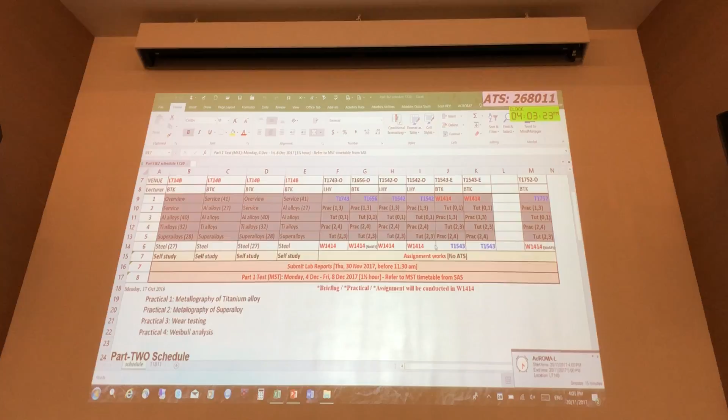Only the MST, right? Okay. So by this week, we will finish the last topic that will be tested for the MST part 1 test.

So this will be the last topic for the part 1 test. Okay, are we all ready? So altogether there will be 5 topics for the part 1 test. It's held during the MST. So for convention, I just use the word MST. It is not the MST paper, it's part 1.

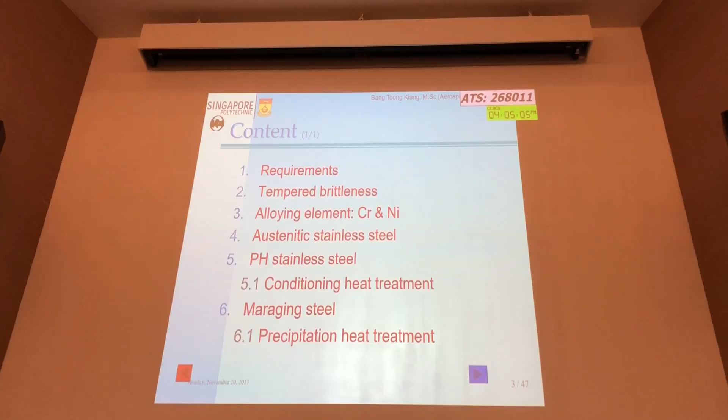It's 30%, right? So the part 1 test will only cover the topic we have learned so far until special steel. So this is the last metal. Next, part 2 will consist of non-metal. This metal, we have gone through aluminium metal, titanium, superalloy, and now we want to finish up with special steel.

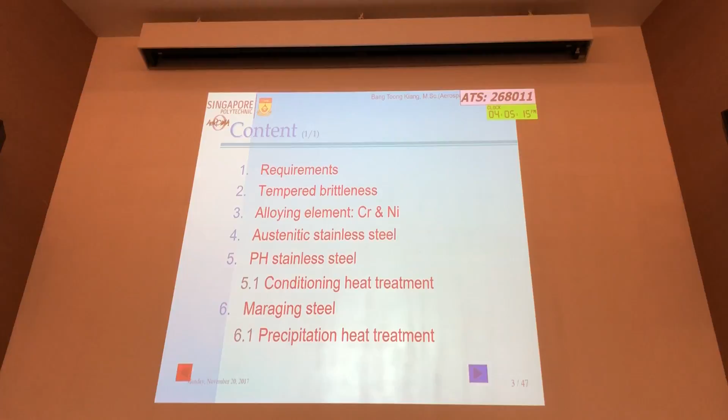From year 1, year 2 and onward, until today, you can see that you have been exposed to steel. Steel is the very first engineering metal. So it has been with us for many years. As I said, very difficult for me to compete with 120 of you.

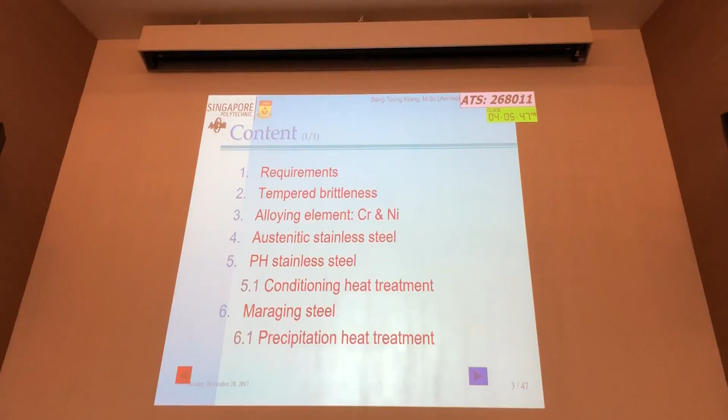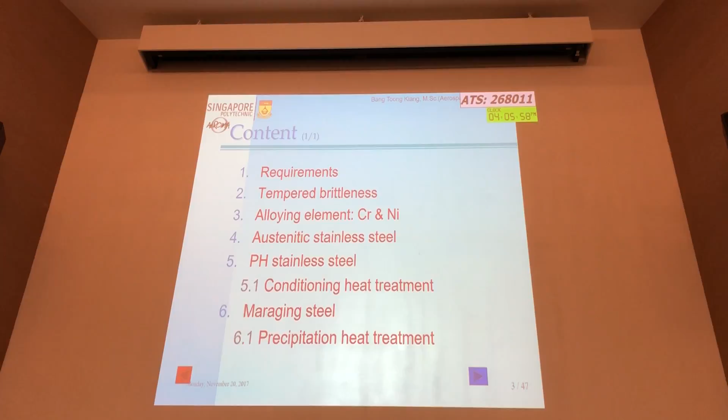Now, so is it still relevant? It's a very old metal. People think that is depending on how you look at it. Obviously, in order to make it relevant, we need to do something. We need to upgrade, right? Including myself, everybody needs to upgrade as we move along.

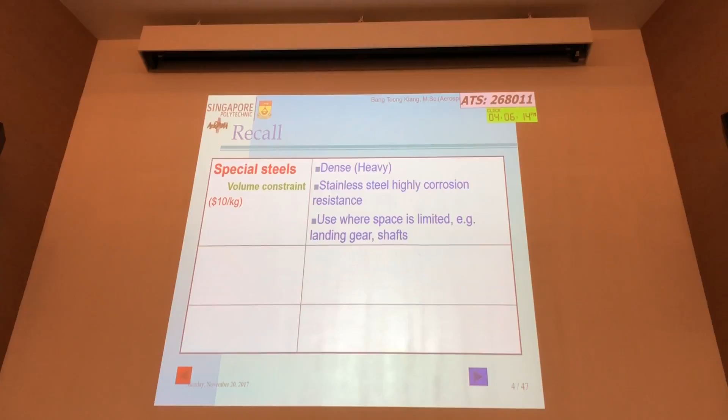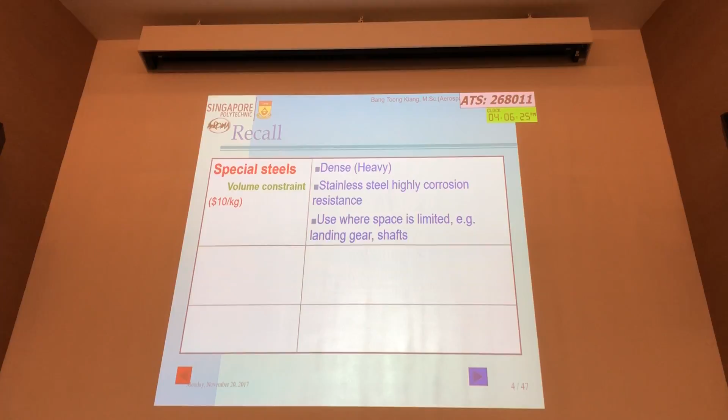We know that steel, as I said, you have already gone through in your year 1, in the very first, second topic of year 1, plain carbon steel, right? So until today, it's still relevant. Obviously, when we move along, we need to do something about it. Why is it that it's still relevant? It is relatively cheap.

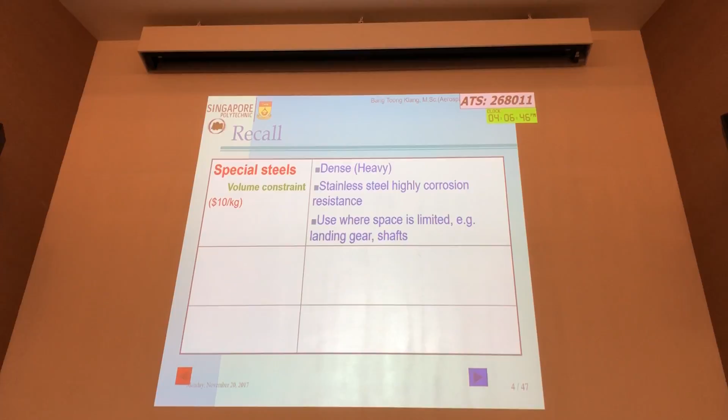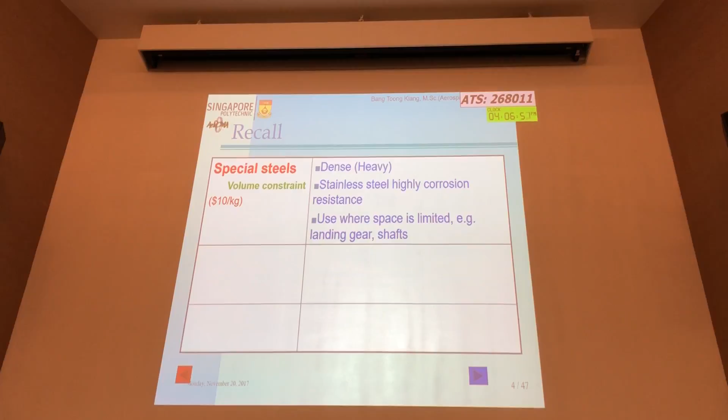We can make special steel, alloy steel we call it, so that it's stainless. So steel itself, initially very cheap, very limited property, but we do some adjustment in the chemistry, right? We're able to use it in a variety of applications. So now in aircraft, we still use it, of course, where space is limited. Landing gears, right? Shaft and so on. No point using titanium, too expensive.

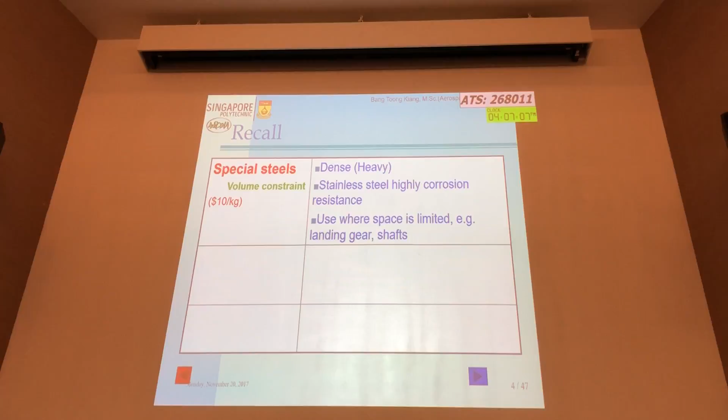And when you talk about the absolute strength, steel is even better, very high strength. You can see that there are applications that is not aerospace that actually make use of special steel. It's developed by Carpenter Technology, which is involved in a lot of aerospace material, aerospace metal.

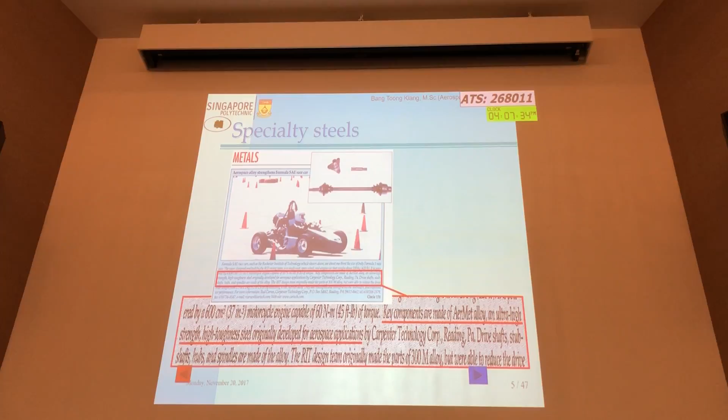Okay, so the key thing is that it's maybe solid. Solid means good in a certain sense. So good that we call it, quite a number of years ago, the advertisement about the army, they call it the steel within. They don't call it titanium. In the army, talking about titanium.

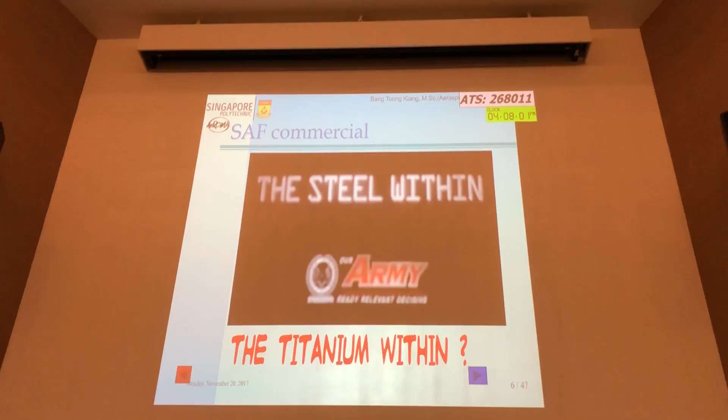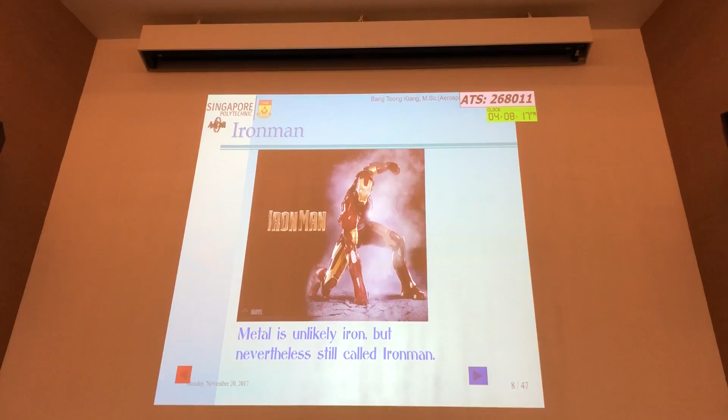Certain names still relevant. So when I look at it, I thought to tell you that don't dismiss steel. Wow, man of steel, man of titanium, right? You see, until today, Superman, Iron Man. So the name, it's just Real Steel and so on. So you can see that the word steel is very old and yet is still relevant.

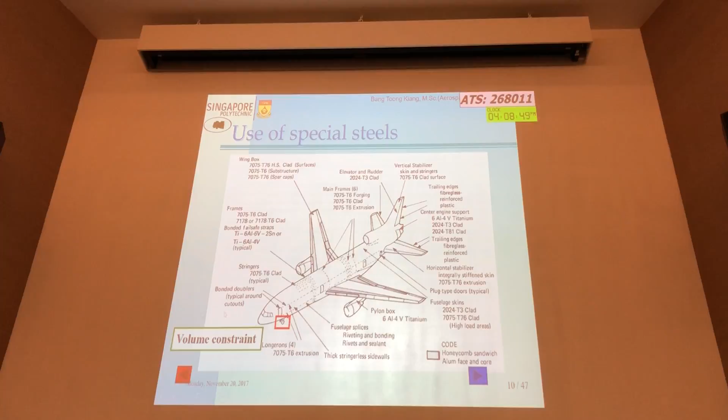Of course, in order to make it relevant, we need to do something. If you don't reinvent yourself, right, you will not be suitable. So I use the word special steel rather than call it alloy steel. The alloy steel you study is quite limited, not used in aircraft. We need to do some adjustment in the chemistry.

You can see that in the landing gear, we can use it, in the shaft. In the engine compartment itself, we talk about superalloy, we talk about titanium. But for the shaft itself, we don't need to use superalloy, we don't need to use titanium. We can use good old steel. It's strong, it's rigid, and we can make it hollow, right? And yet it's strong enough to withstand all the loads. It's small also, right?

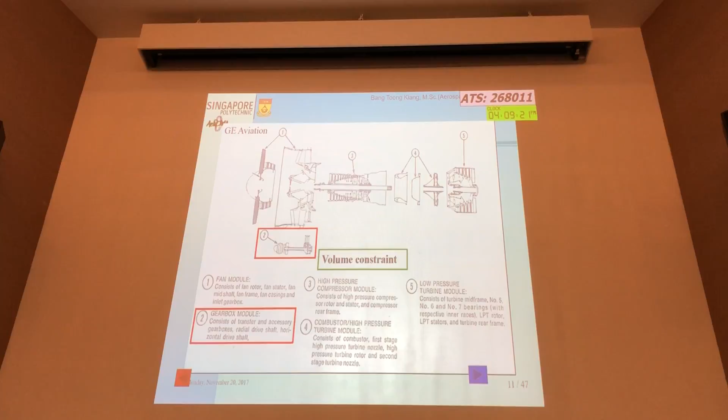However, when we look at the aerospace application, we need to do some adjustment. If we take it as what the existing steel, we are unable to use it. As I said, metal material is everywhere. It is not restricted to one application. How you utilize it depends on what is the requirement.

If the requirement is not met, you do some adjustment. If after several adjustments you cannot do it, of course we need to have some replacement. So material can be used, right? Even 1,000 years from now, it's still relevant. All the metal is there.

Now, what is added? Now you can see that the shaft, the landing gear, we don't need to be ultra high strength. We just need adequate strength. That's why in the landing gear they have certain hydraulic suspension, this and that, to absorb. So no point having ultra strength, that will cause high price. So you still have some suspension to take care of that.

So adequate strength, when we talk about adequate, this is a key word. What is adequate? So we compare in terms of most general definition, low, medium, ultra. So we are talking about ranging between that. So this ultra high strength, steel can go into that. Ultra high strength.

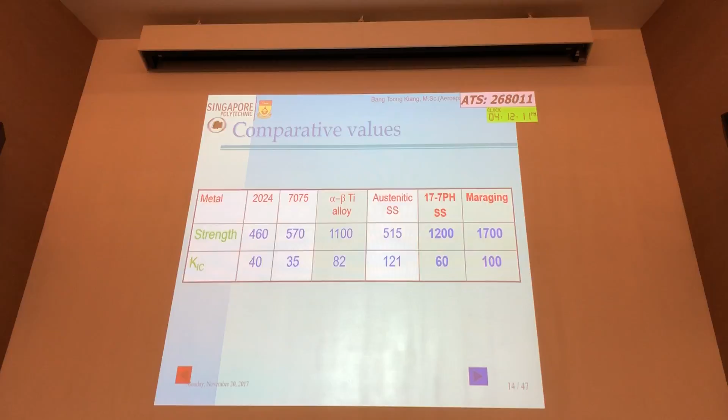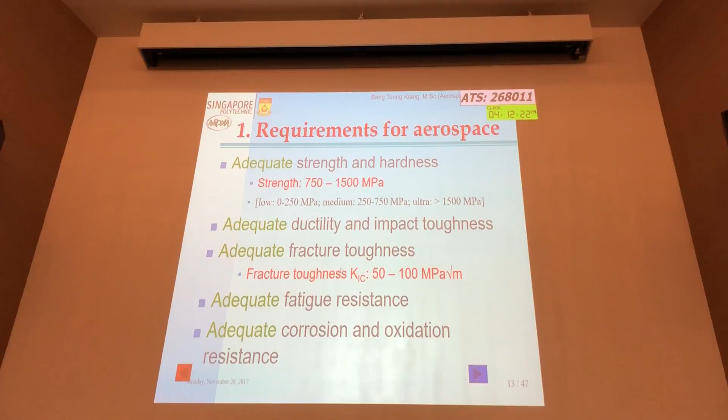Okay, so you look through that. Aluminum we have already gone through. That is, as I said, the two things that we are concerned with. Strength and toughness, fracture toughness, not impact toughness. Fracture toughness is two things. So I use this, look at the material that we have. Aluminum we've gone through. If you look at research, Google, whatever, this is the type of strength that you have.

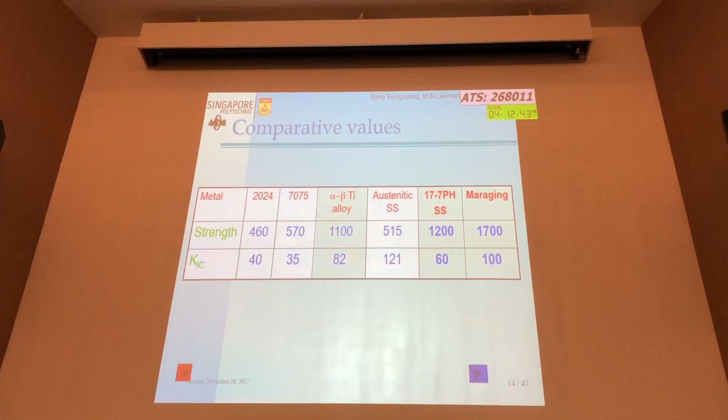Toughness not even meet. Alright, strength. Titanium very good, expensive, very expensive. The steel that we have that's able to consider is that of austenitic stainless steel. Toughness okay, but strength not there. Alright, so we need to do something.

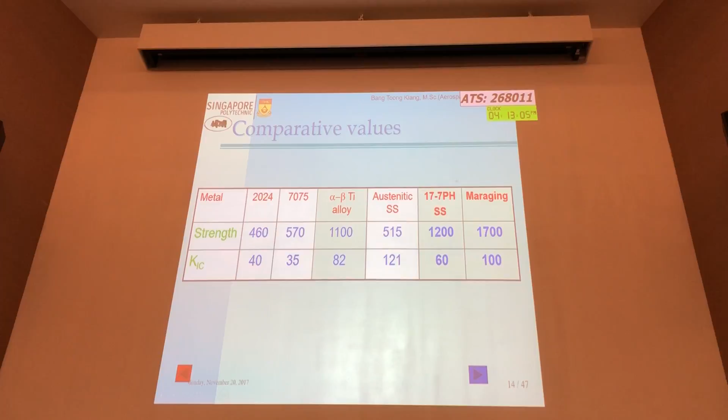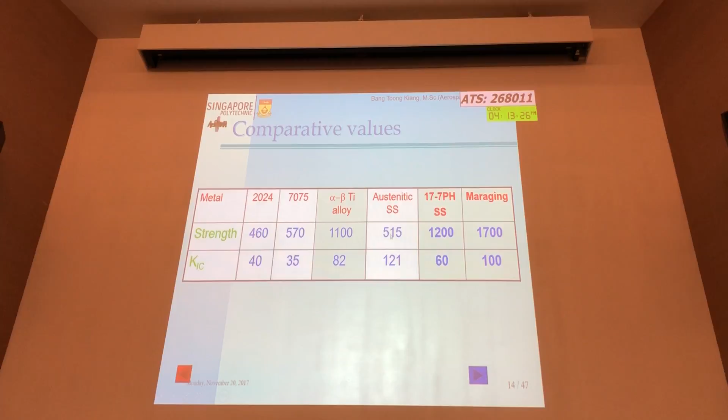So these two are special steel. So just looking at this, these are two special steel which we will be going through in this topic. So toughness, definitely quite good, in fact the margin is even better. So these are the two. I classify this as special steel, right? These are the normal steel, alloy steel.

So these are the conventional steel for a lot of application. Yes, we can use it. It has the strength, it has the toughness. So you can see that a lot of other applications, connecting rod, shaft, not a problem. The problem is getting the combination of strength and toughness.

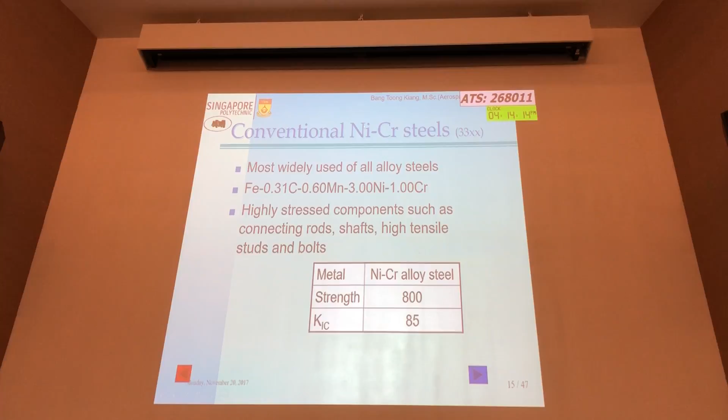Alright, so this is conventional steel, alloy steel, very widely used for those car shaft and so on. So they have the adequate strength, toughness, but when you look at the way the combination of strength and toughness comes about, obviously it's through the normal heat treatment process. Again, this one you should be familiar with. So you can see that for the slide that I've gone through, some of it should be familiar.

So just a recap. So what you did is that to get a combination of strength and toughness, you heat it up, you soak it, you quench it. You get martensite, very hard, very strong, very brittle, but it will lead to cracking.

So what we did, we do some tempering. So if you look at the one you studied, we either temper it below 200, 250 - if we do it at less than 200, 250, you will merely reduce the residual stress without affecting the strength. Still strong but not very tough. So usually we do it above around 400 to get a good combination of toughness. If you do it more than 600, you will lose all the strength and gain the toughness.

So you do it at 200, 400, 600, that is normally - and you get the combination. But for special steel, if you do it between this range, you take a piece of metal, steel, you heat it up, you polish it, you do it at home. You polish it, you heat it up, the bluish color, spectrum of color.

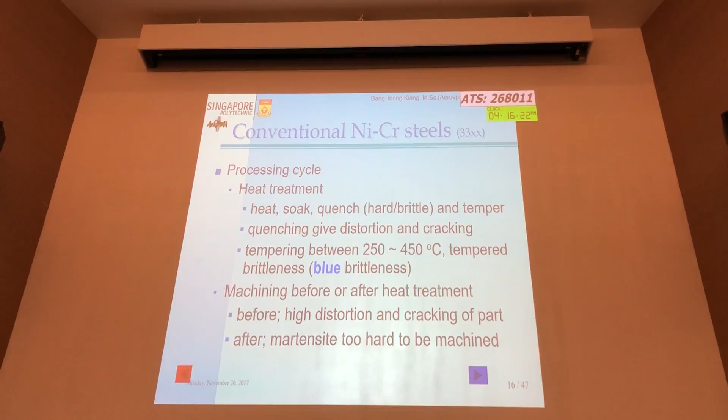Around 300, 450, the bluish color will appear. You continue heating up to 600, you can see the first indication of reddish color appear. So 400 plus, bluish color; 600 plus, the first reddish color; 800, it's glowing red.

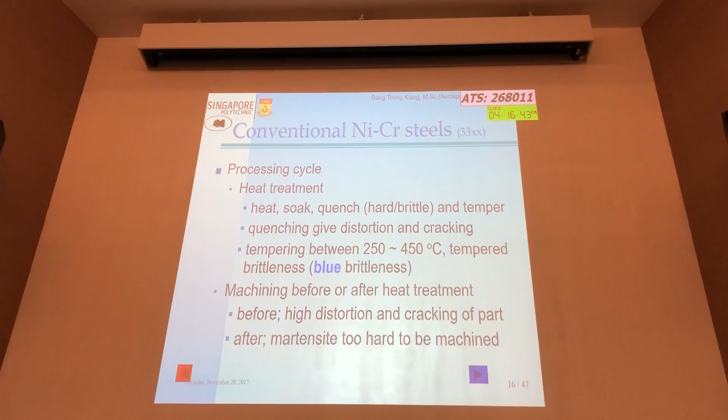So in the past, the blacksmith based on color, they start knowing what temperature, what color, in order for them to start smashing the blade, whatever.

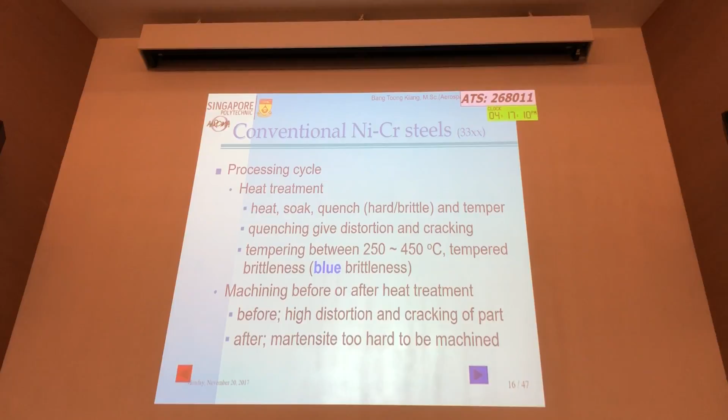So that is the key thing, bluish color. The bluish color, we try to avoid. Something happened there. But if you don't do it within this range, you cannot get the combination of toughness and strength. You do it below it, you got strength, no toughness. You do it above it, you got toughness, not adequate strength.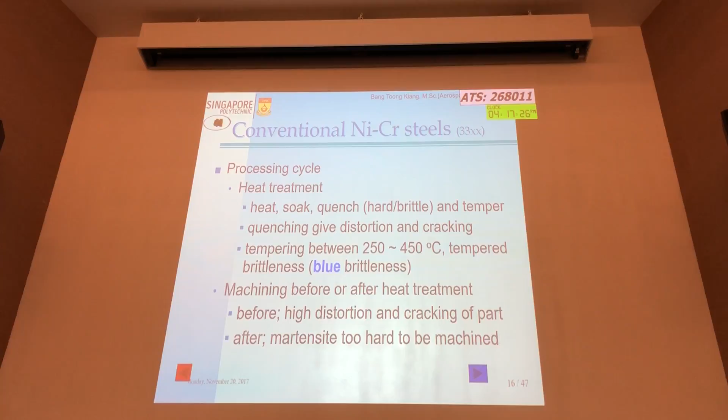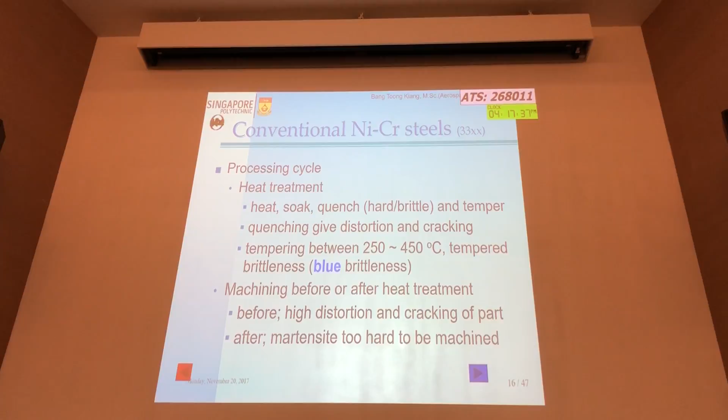So how to get this? That's the problem, so usually we don't play with this range. For other applications, you have to get the strength and the toughness right. More than 450, you got more toughness, at least you still got some strength. But you want to get the one suitable for aircraft, that's a problem. So we want to look at this in greater detail.

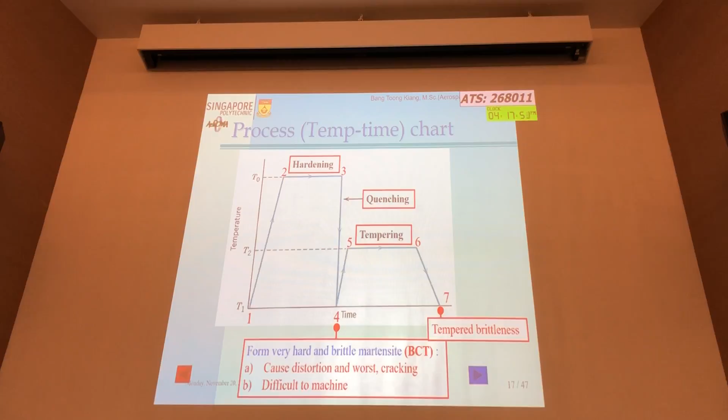This one I think you should be familiar with. Again, I like to use a process chart to indicate. As far as heat treatment is concerned, same thing: you heat it up, you hold it, you quench it, you reheat it up, you hold it, you cool it. Different names are applied for steel, we call it hardening, tempering. And during the hardening, something nasty happened.

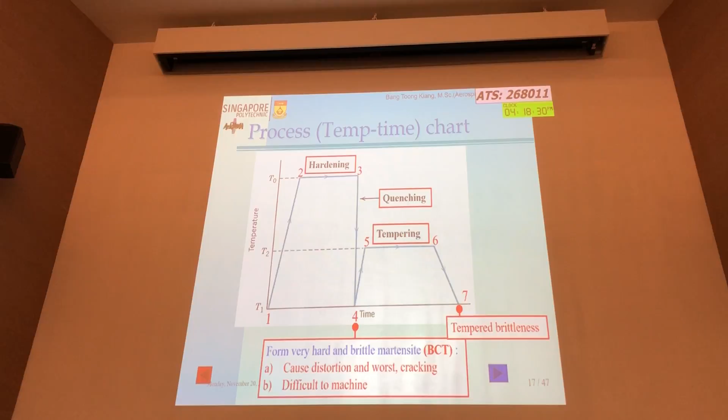Sometimes engineers, scientists are crazy. Take it hot and then quench it, the likelihood of cracking is there. It forms very hard, we call it martensite, and then distortion occurs. When the thing is distorted, you want to undistort it, but it's very difficult because it's so hard. You can't even machine it back to the precision needed for an aircraft component.

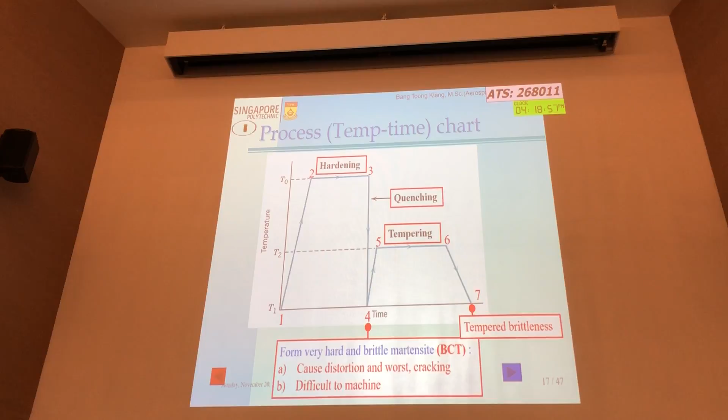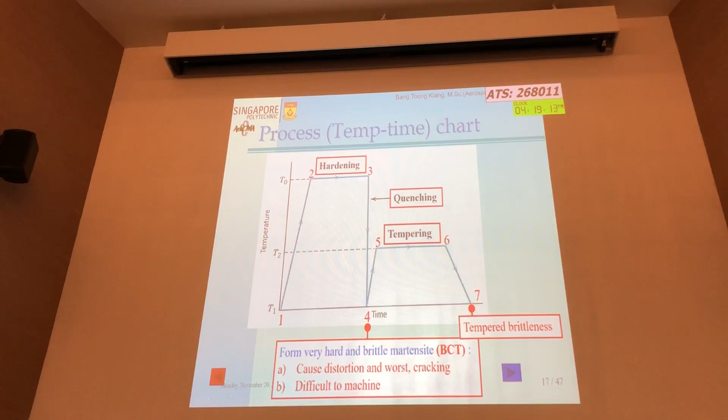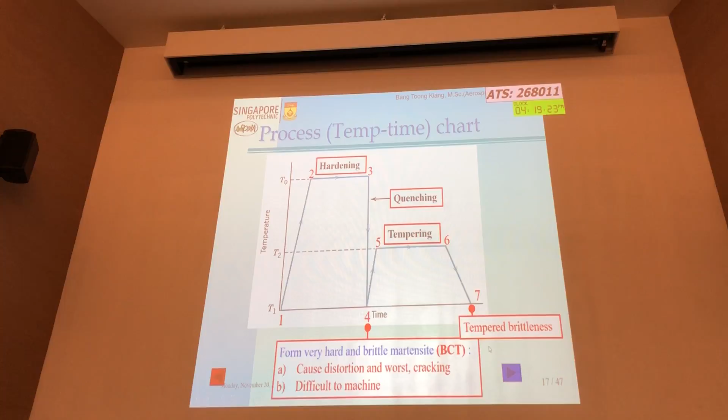For the case of aluminium, titanium, remember, when we quench it, it is soft. So any distortion, we can still bring it to the precision dimension because it's soft and ductile. The strength is gained later on in precipitation hardening, at low temperature. So the distortion that takes place in precipitation hardening is negligible, but this one is very significant. Alright, so we have a problem.

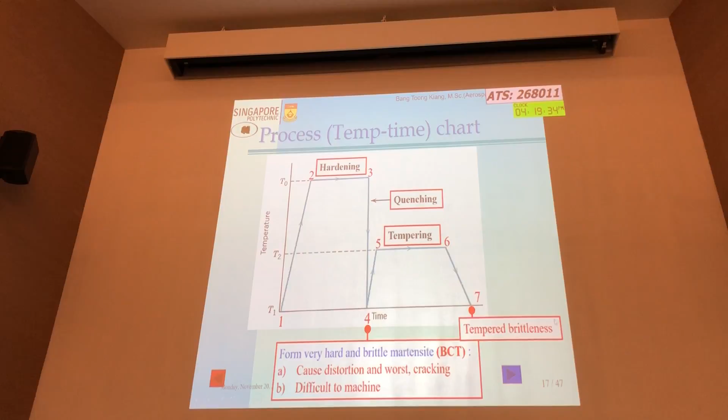And if you manage to overcome this, you have a second problem that gives us some difficulty: temper brittleness. You want to avoid around 250 to 450. So let's look at what's happening here. This is a key thing: temper brittleness. The industry, because of the bluish color, calls it blue brittleness. This bluish color, I think some of you may have observed it.

You know those metal strips that they tie things together, those metal strips, don't know whether you observed or not. You look at it, bluish color, the strip, the metal strip. Now mostly they use plastic to tie things, but some of it is still metal strip, bluish color. So that is a key problem: sometimes along the transportation it can break. Bluish color, how does it happen?

Now this diagram, you actually don't need it, because we want to look at the red square, the red rectangle, just to share with you what's happening. Now under normal conditions, in plain carbon steel, normal steel, nothing of this sort happens.

You harden it, you get very high strength. The toughness, measured by reduction in area or the impact test, is very low. High strength, low toughness. Now you were told on day one, when you want to improve the toughness, you do tempering, which will give rise to toughness with a reduction in strength. That is the green line. If nothing happened, that would be expected - but unfortunately for alloy steel, instead of increasing toughness, there is a drop in toughness in this range.

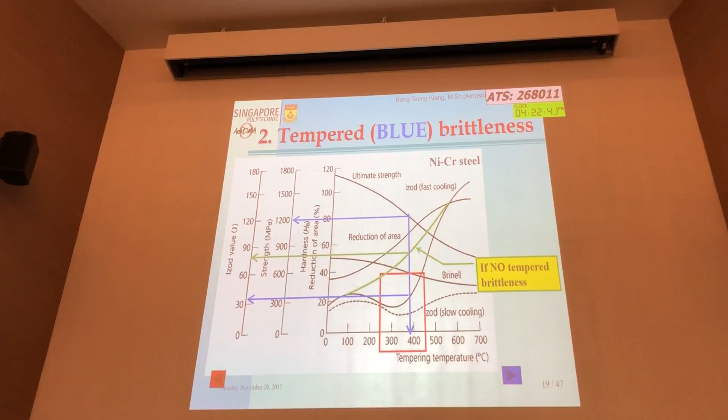Because this is a special case, in your year one, we don't even bother to mention it. But here you need to understand what's happening. This is the detail that we want to look into.

So after hardening, you quench it. You got martensite. What is martensite? That's an appearance, but what essentially is it? What does it contain? What happened? A steel contains iron plus carbon, right?

When you quench it, you are actually trapping carbon, super saturated. So martensite is a super saturated solid solution. It is iron trapping carbon.

Under normal situation, the iron is BCC. The amount of carbon that can be inside is 0.02% carbon. At high temperature, it is FCC. It can trap 2% carbon. That's why the units are very important.

So low temperature is actually BCC, we call it ferrite. It can only contain 0.02% carbon. That's why we need to heat it up, to become FCC. We call it austenite. It can trap 1.7% carbon, in fact all the way up to 2%.

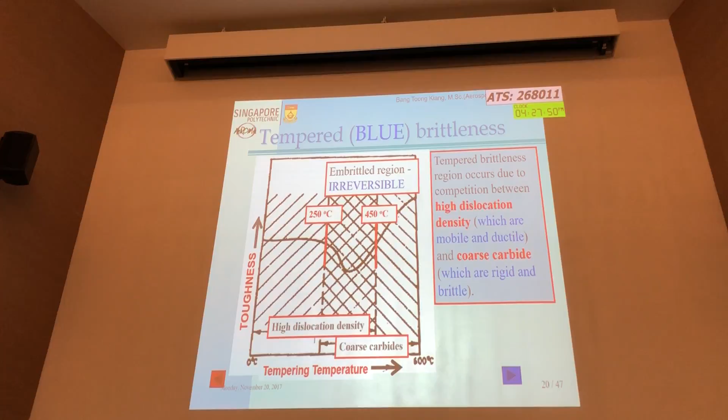But if you are talking about a lot of carbide, then the interaction will take place within that. So that's why you can see that if you do it at a lower temperature, there is no interaction. The carbide reduces, the carbide formed goes to the grain boundary without interacting with the dislocation - this slash line represents dislocation, this one represents the carbide.

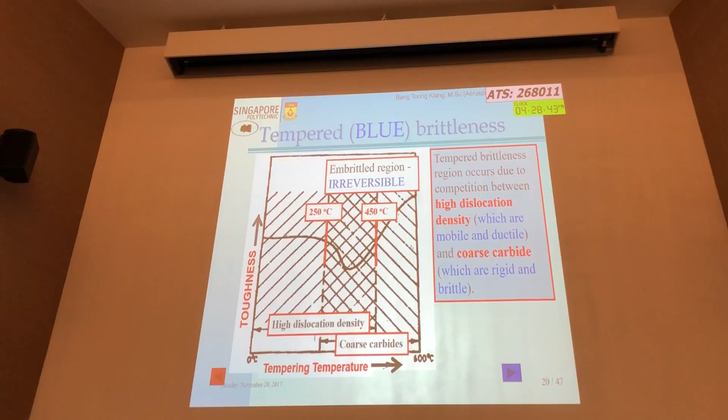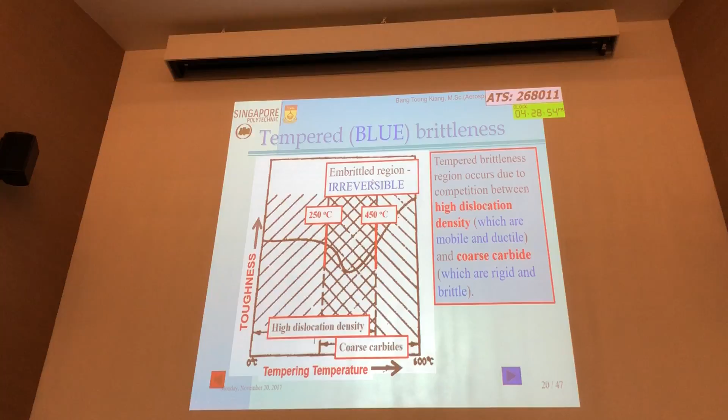So if you do it at this temperature, the carbide is still there, but the dislocation doesn't interact. If you do it above there, the carbide will not interact with the dislocation. It's only when you do it at this temperature will the two interact. This interaction is the one that gives rise to tempered brittleness, that makes the toughness reduce. So if you overcome that, the toughness will continue to increase. That is a key feature of tempered brittleness.

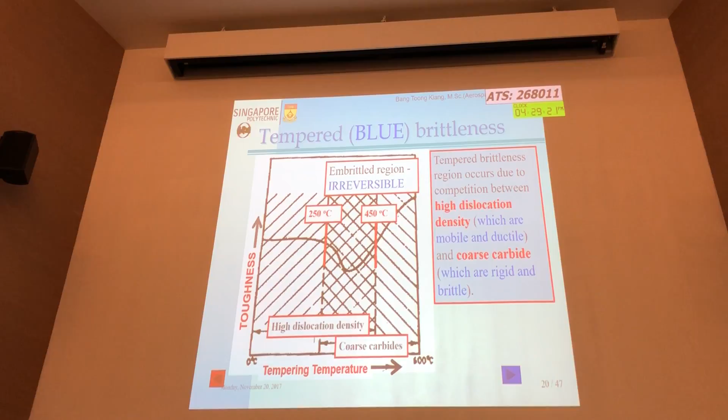Okay, so as a result of that, we need to do something to get the correct combination. That's why I said there's an alteration of the way the phase diagram works. So if you don't do anything, you need to do some chemistry. Now, we have many steels at our disposal.

This one again, year 1, year 2 you learn, but we need to zoom down. Whenever we start, we need to have some basic understanding. So we need to zoom down and look at plain carbon steel, alloy steel, high alloy steel. In high alloy steel, you talk about stainless steel, tool steel. I think that's year 1, isn't it?

Okay, definitely we don't start with plain carbon steel. Plain carbon steel, the carbon is too negligible. The carbide form is cementite. You can't even trap too much. Tool steel, wow, you get very hard, very strong, but no toughness at all.

So the low alloy steel, again, this one we mentioned, you have an interaction problem. So therefore we need to start with the stainless steel. And remember, one of the requirements is oxidation resistance. Alloy steel doesn't have oxidation, corrosion resistance. So that is the group we started with, stainless steel.

Okay, so you must know the reason. So you have plain carbon steel, low alloy steel, high alloy steel is divided into stainless steel and tool steel. That was what you learned in your first year. Plain carbon steel, alloy steel. Alloy is high alloy, low alloy. Alright, low alloy is actually a replication of plain carbon steel, but does a job better.

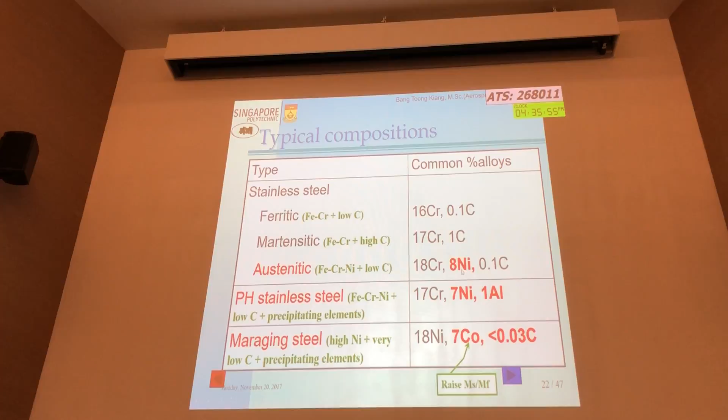So this one I just summarized to you, in layman terms as simple as possible, how we adjust it. That's why I highlighted certain very key ingredients. We use austenitic, you need nickel. So with the addition of nickel, later on we'll see, nickel will depress, will lower it.

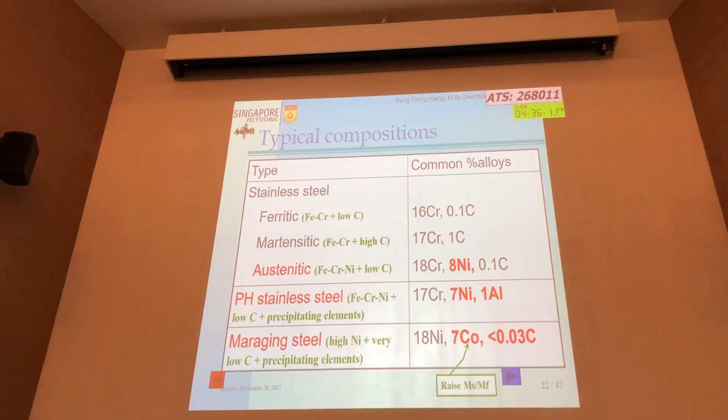Now just a reminder, steel is an allotropic metal, same as titanium. For those who attended the lab, I think titanium was also mentioned. Above 910, if it is pure iron, above 910 it is FCC. Below 910 is BCC, for the case of steel.

If you want austenite, you need to add some austenite stabilizer. We have alpha stabilizer, beta stabilizer. This austenite stabilizer, nickel is the one. You add nickel in, you bring austenite down to room temperature, and now you make it non-heat treatable. Strength is not there.

Below is BCC. We don't have adequate toughness, no strength at all. So we need to do some adjustment for steel. Take note, you can see from here, we use the austenitic, we still retain the low carbon, but we are going to put in precipitation element.

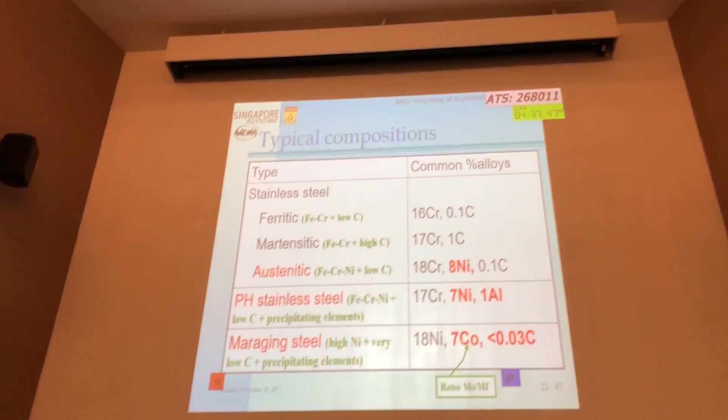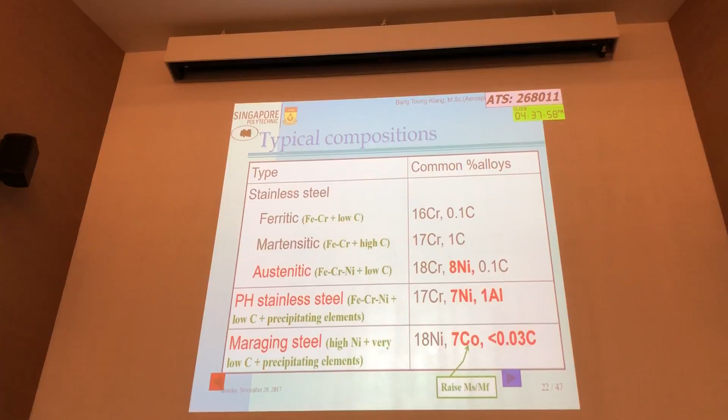And you realize this very important element, aluminium. Nickel, aluminium form gamma prime. It's superalloy. Nickel, aluminium form gamma prime, FCC. Austenite is also FCC, so they match. So this development of gamma prime was started in superalloy, and we notice the beauty about this gamma prime, and we adopt it in precipitation hardened stainless steel. See, so we borrowed it from there, just much.

And later on, we don't want, no need to have that. We have very low carbon. This one's expensive, and we use more nickel to form the precipitate itself. Okay, let's go through looking at the chemistry. So there's some chemistry, not too much, it's not a chemistry course.

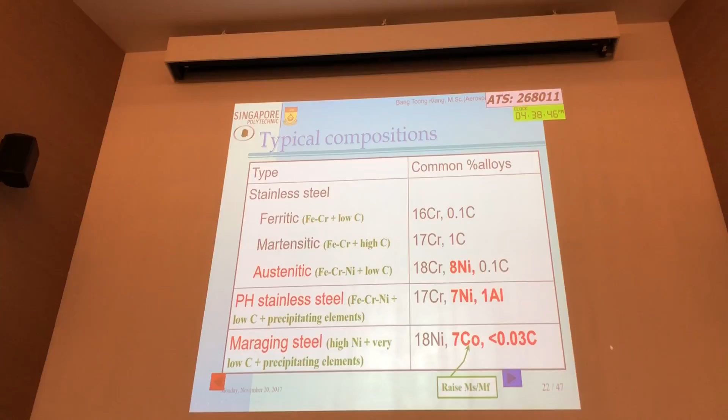Okay, this will give me corrosion resisting, very high corrosion resisting. This will also render it non-magnetic. So this is more preferred for aircraft. Very highly corrosion resistant. So therefore we do something to bring this temperature down.

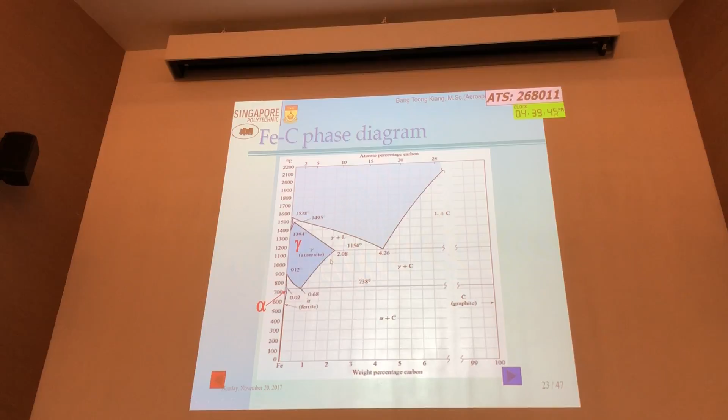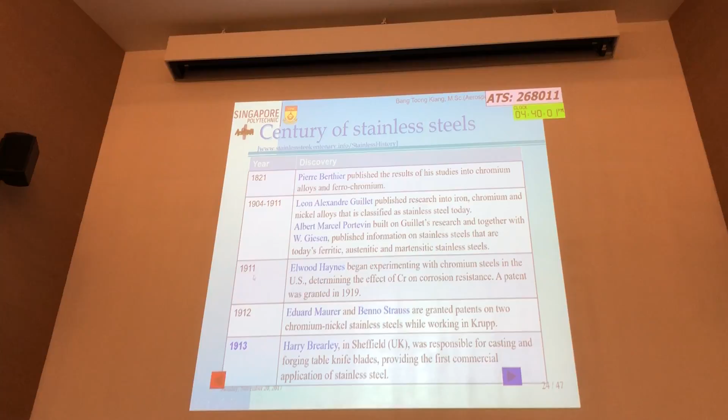Okay, to further ensure that it's stainless, we add in chromium. Stainless steel is already 100 years old, you can research it online. It started 100 years ago, just celebrated that.

These two very important elements, chromium and nickel. Let's pay attention to this. Chromium, we added chromium. Why do we add chromium? To make sure that it is stainless. Alright, to make sure it's stainless.

So temperature against chromium, in other words, you take iron, you add chromium in. You can see that you need at least around 12%, maybe 13%, we put in more than that. This portion here will give you, you need at least 12% to give you stainless property. Less than 12% you will not get stainless property. But the implication of adding 12% chromium is that it stabilizes alpha, it makes alpha stable.

Okay. That's why I really want you to understand this, it's a difficult topic, right?

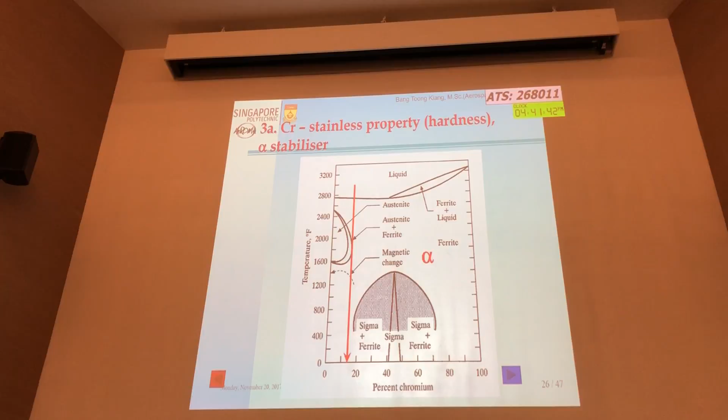So you get stainless property, but you produce alpha, you stabilize alpha. It's just an alpha stabilizer, beta stabilizer, like in titanium. Now, our aim is not only stainless, we want it to be non-magnetic right now. So we need to make sure that it is stainless and yet it's gamma. But we have no choice, we need stainless chromium.

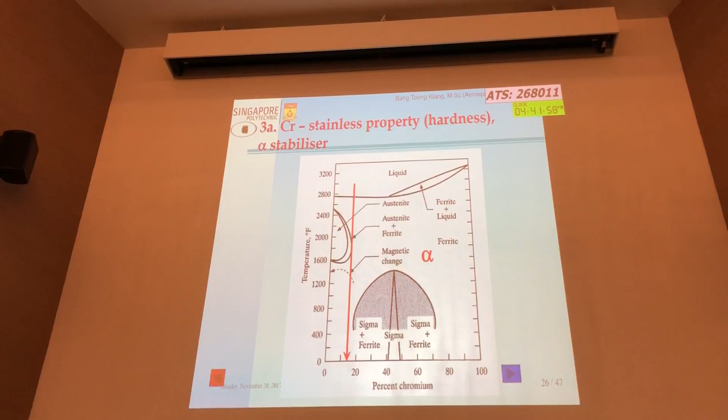So to counteract this, we add nickel. You see, at least 8% nickel, then you bring the austenite down. So you leave the chromium to do the stainless property, and you add nickel to introduce and make sure that the austenite is present. The more you add, the more you stabilize, by at least 8%. Alright?

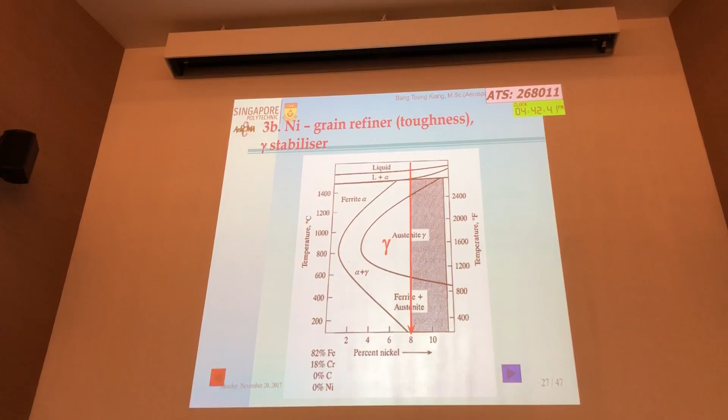Okay, now a lot of stainless steel, we add in 10%. In the past it was 18% chromium. If you look at your stainless steel products, those teapots, sometimes they put a stamp there. Of course now they use the modern symbol, 304. They put a stamp there, 18/8. 18 means 18% chromium, 8% nickel.

But if you look at the newer ones, they put 10% nickel. Slightly more expensive, but better corrosion resistant. So minimum 12% chromium, right? The more, of course, the better lah. Money only, right? And nickel, you need at least 8%. So now the modern ones add 10%. In the past, they kept it cheap, right?

Okay, so with the combination of these, right, you will now have austenitic stainless steel, which is austenite at room temperature, isn't it? So you get that.

Wow, going to be more confusing now. Just 2 elements only. So, just a recap, you add chromium in. You don't have to remember the phase diagram, but when you look at this phase diagram, the thing is you need to know some numbers. You need to know, as I said, you need at least 12% chromium. So, if you add in chromium, right, you can see that it will become stainless, but you will produce this a lot, right? Okay, that's a key thing you need to know.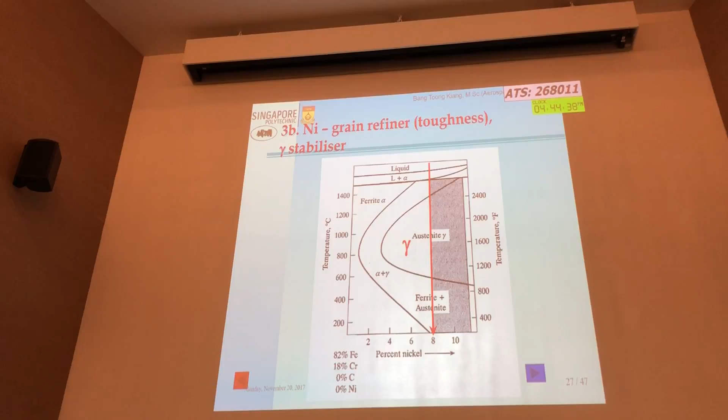And to ensure that we want this, we add at least 8% nickel. Remember, you are not throwing away the chromium, the chromium is still there, alright? So you have stainless steel, austenitic, chromium plus nickel. If you add chromium alone, it will be stainless steel, magnetic, but magnetic doesn't matter for application.

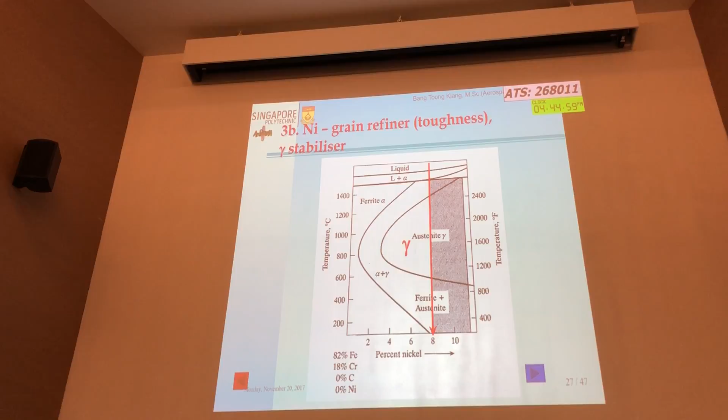Right? You go to IKEA, a lot of stainless steel, very cheap, ferritic one, you put a magnet there, you stick it there, it's magnetism. This one's very expensive, okay. So ferritic one is cheaper, right? This austenitic is more expensive.

So all the food processors, right, storing containers using metal container, it must be austenitic. Sometimes the inspector, MOM, goes about checking, they just bring a magnet, see whether it is magnetism or not. So if the food seller uses that for storing all the food, all the pots, stainless steel pots, and then it's magnetism, they get caught already. It's a requirement, non-magnetic. The MOM finds it.

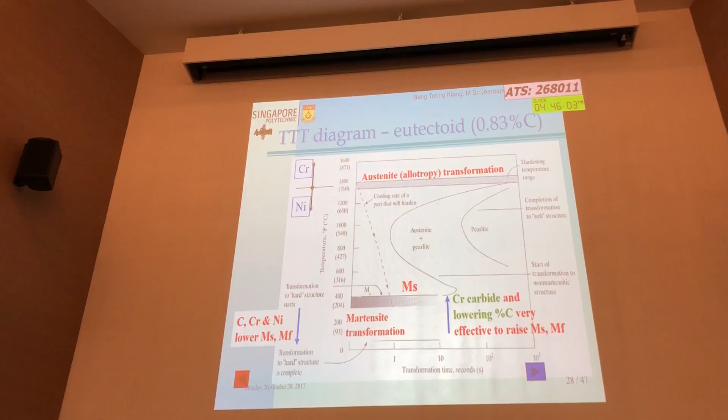Because once you have austenitic, non-magnetic means that the hot stuff, whatever food, whatever sauce, it will withstand all the corrosion. Food stuff, right? All the sauce, all the chili sauce, ketchup is corrosive, right? You need that to store. Otherwise, when you eat, food poisoning.

Okay, coming to this. This one requires some really tremendous understanding, as I said, right? Just now was not the main thing. The main thing just now is that we have austenitic stainless steel, right? This is not the end game yet, it's just that we use that attempt to create special steel for aircraft, right?

So just now, however many slides, it's not the end game yet, this is just the beginning. So what we did is that we have now got the austenitic stainless steel. We are going to use that now to attempt to create special steel that is suitable for aircraft, isn't it? So remember, austenitic stainless steel is not suitable yet. It has the toughness, but no strength.

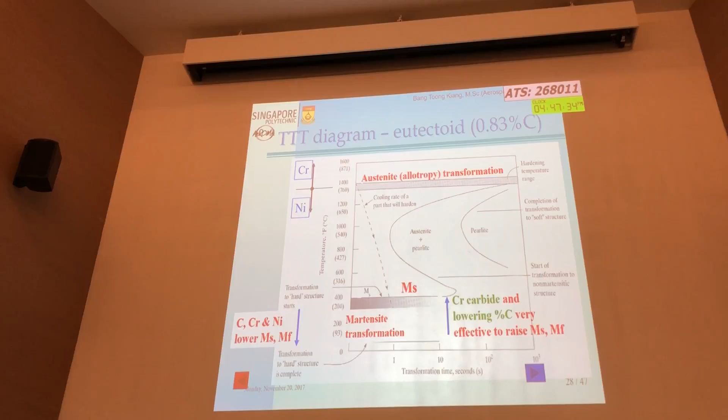The only good thing about austenitic is that it is non-magnetic. It has very good corrosion resistance. Right? Toughness, you got, but strength completely out. On top of that, it is not heat treatable. Okay? But we are going to use that as a base starting point to create precipitation hardened stainless steel. Alright?

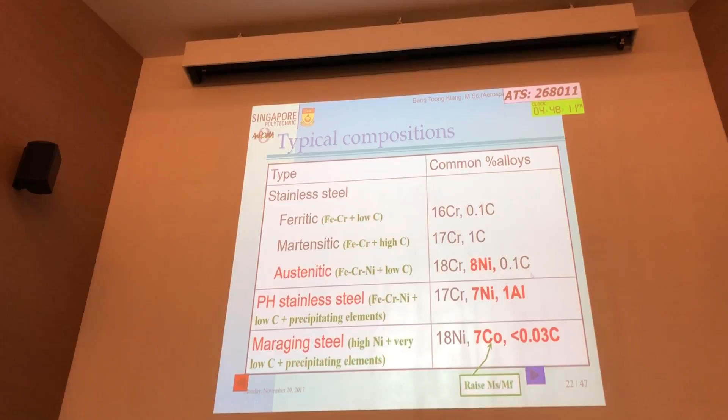So what we did is that the ingredient is very important, alright? So to create this, the carbon is still low. But what happened? We reduce the nickel. We incorporate aluminium. Very important, huh? Very important, huh?

Why do we reduce nickel? Chromium, as I said, 12% is good enough, right? Okay, we can reduce it. This one gives me the stainless property. This one supposedly gives me the austenite, right? So now we reduce it, you know. We add in this. Okay, these two are very important, huh?

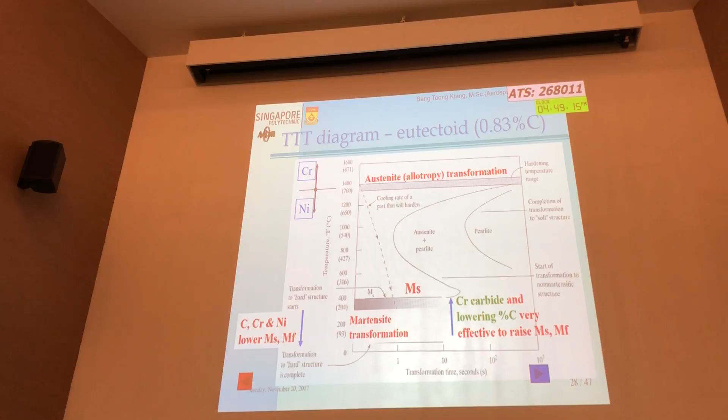Why do we reduce the nickel? Chromium, as I said, you can reduce it, but the more you reduce the chromium, the less stainless it will be. So you try not to reduce the chromium. Nickel, actually you don't want to reduce, but you have to reduce for certain reasons. Now, you add chromium, you add nickel, you will reduce the MS line. This is something you learn in year 1, year 2, the MS line. If you've forgotten, time to put on the thinking cap.

Now when you put in, that's why we have very low carbon. We have chromium, which gives stainless property. We add nickel in order to give austenite. But because of this, the MS and MF are drastically lowered, way below room temperature. That's why you heat up the austenite, you quench it, nothing happens, because the MS has been lowered so much. So what we do is reduce the nickel so that the lowering is less drastic.

Remember, we want to do heat treatment. If you put too much nickel, you lower the MS so much that hardening becomes very difficult. So we reduce some nickel to raise the MS temperature. But even raising the MS temperature is still not enough. We need to form carbide to further raise the temperature, which is still way below room temperature.

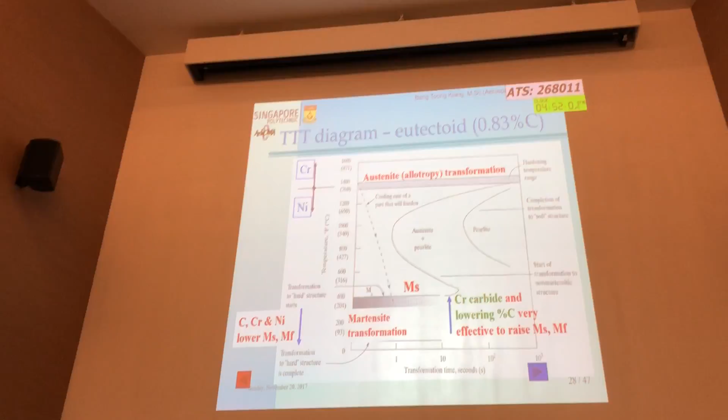So the thinking is: we add the nickel to give austenite, but that makes heat treatment impossible. So we remove some nickel to at least raise the MS line. It's still below room temperature, but at least raised somewhat. The other way to further raise it is to create chromium carbide, so as to further raise the MS temperature and allow it to be heat treatable. That is the principle behind precipitation hardened stainless steel.

A better approach is to really reduce the carbon content, make ultra pure iron - reduce the carbon content. This is the principle, the philosophy behind maraging steel. Lowering carbon is the principle behind maraging steel. So one approach is carbide formation to make it heat treatable, the other is ultra pure iron - getting rid of carbon to give precipitation hardening.

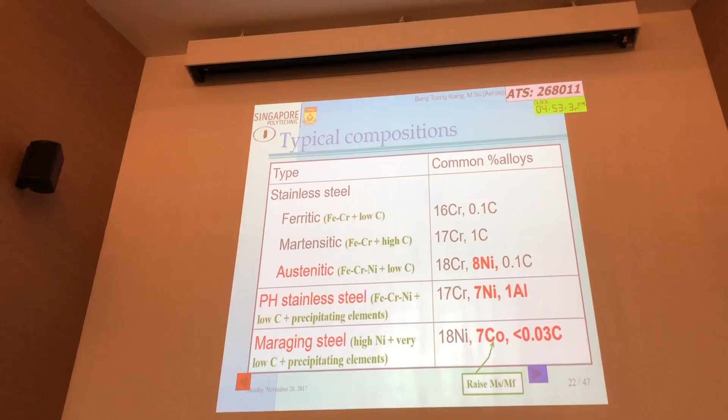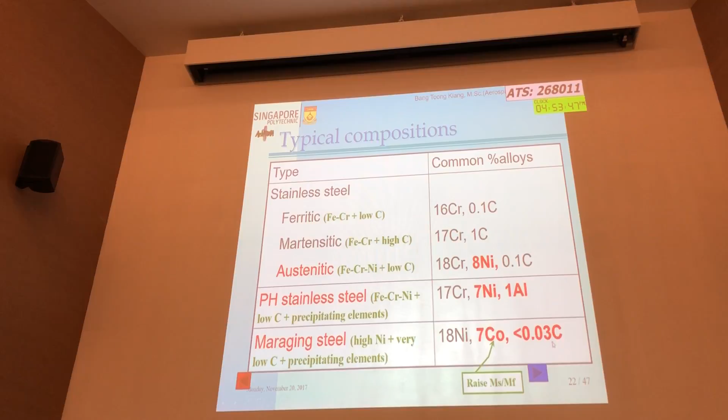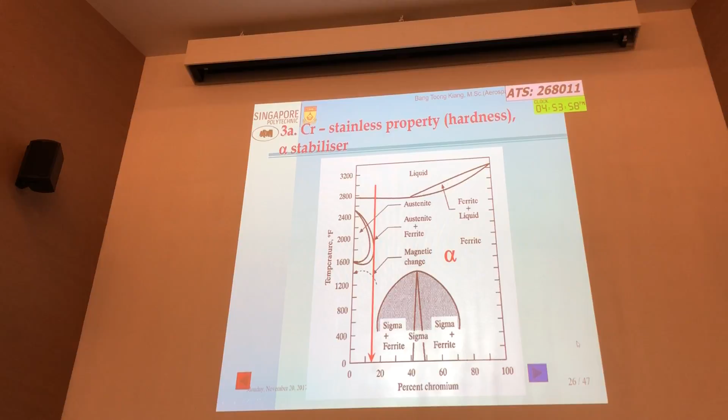Now some of you may think, hey, this one is better - but purifying is very expensive. Extraction, on theory again, very nice, wow, 0.03. But to get rid of it is not easy. Singapore took so many years to get the NEWater quite good, right? You must make sure it's super clean, otherwise you drink it - it's not easy, seriously not easy. They're going to increase production so by 2030 I think 55% will be NEWater. And sometimes when it was created it was laughed at, especially across the country.

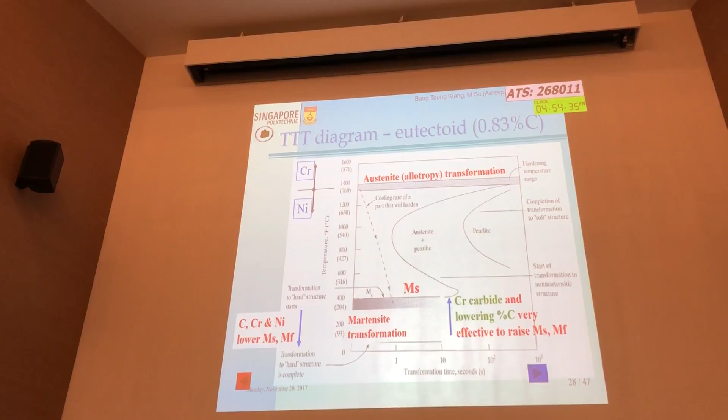So this is the key thing - we're going to use carbide, chromium carbide, to raise it, or we're going to use carbon reduction. Okay, I'll stop here. We'll finish up on Thursday, covering the difference between the two. If you don't understand, we'll continue next time.